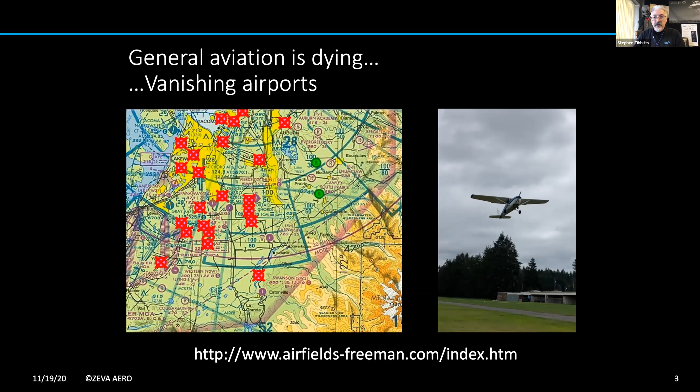There's over 500 small airports between Seattle and Portland that have gone away very quietly. They've become victims of developers and condos. So that was super discouraging. Back in 2003, I started thinking about this: wanting to take advantage of air travel for local flights and not having airports was a real problem. So I actually started thinking about it and looked at a number of different things.

But in 2005, I wrote a grant proposal to NASA entitled EVA, Tilt Rotor Electric Vehicle for 21st Century Atmospheric Flight. At that time, nobody was really looking at the space. I got 2 thumbs up on the grant and 1 thumb down, so I didn't get the grant—you had to have all 3. But I built a model and messed around with it a little bit, and then I didn't have money, so I put it on the shelf.

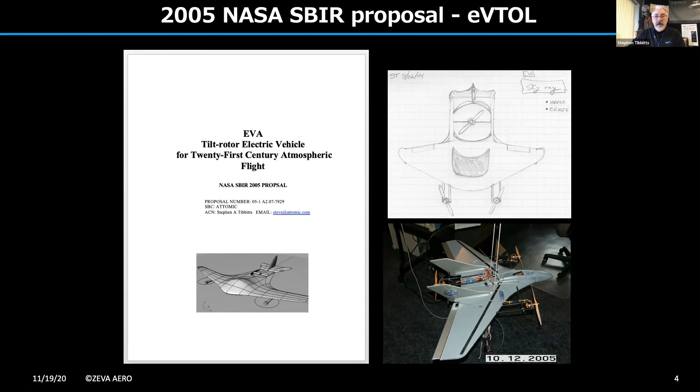In 2017, we learned about the Boeing-sponsored GoFly prize, which is a $1 million X Prize. So we put a team together to go after this. All of a sudden, the world had caught up to my idea, and everybody thinks it's a good idea to look at eVTOL. And just after that, in 2018, Uber Elevate 2 happened.

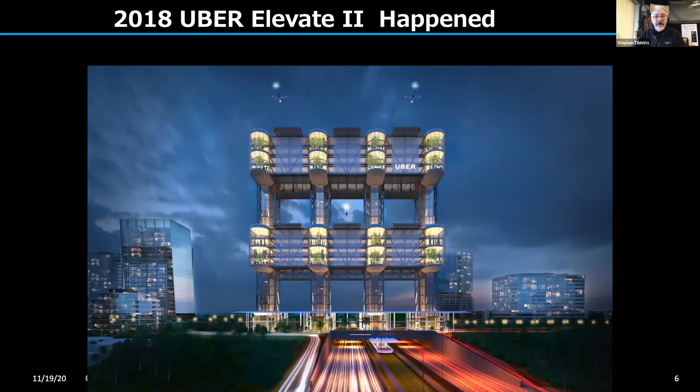So in 2020, here we are—there's over 120 vehicle companies. Some people say there's as many as 180 vehicle companies. The market continues to heat up, the analysts are getting involved, and big money's jumping in because they see trillions of dollars at stake. Uber, Toyota, Hyundai, Intel, Boeing—these guys are all making huge investments. The analysts are getting on board too, with Morgan Stanley saying $1.5 trillion globally by 2040.

So what we're involved with here is a paradigm shift. The shift, I believe, to eVTOL transportation represents the largest market opportunity of our lifetimes. In fact, just this week, a Frost & Sullivan report came out—they predict 430,000 urban air taxis by 2040, which is very much in line with where we're at.

This is ZEVA specific here, how we see the whole thing rolling out in time. 2020, eVTOL bursts onto the world stage. Through the GoFly competition and the work being done at Boeing, Airbus, and Joby, in 2025 we see air taxi service begin—though some companies say they can pull that into 2023, which I think remains to be seen. We see UAM being ubiquitous by 2030, and by 2035 there's room for personal eVTOL ownership. By 2040, we believe consumer-owned eVTOL will become the norm.

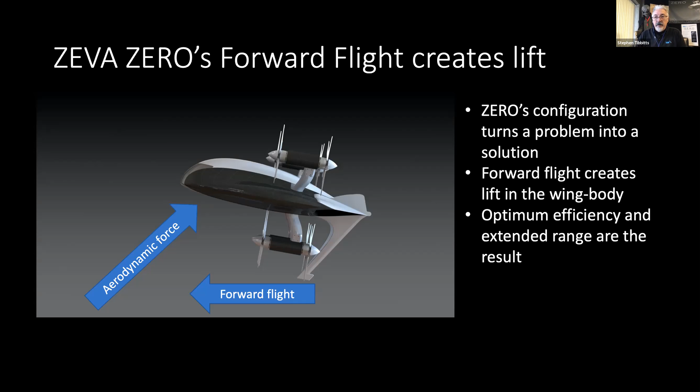The differentiation, or claim to fame, what makes us unique, is that we're using a blended wing body to create lift. As we travel through the air, once we're in transition, we get lift from the body, so we're able to use a lot less energy. Whereas other vehicles like EHang and many others are hanging on the propellers the whole time, they have to burn energy just to stay in the air. We can go faster and farther with about a 50-mile range. That's the big differentiation, and it's getting the attention of a lot of people interested in this kind of technology.

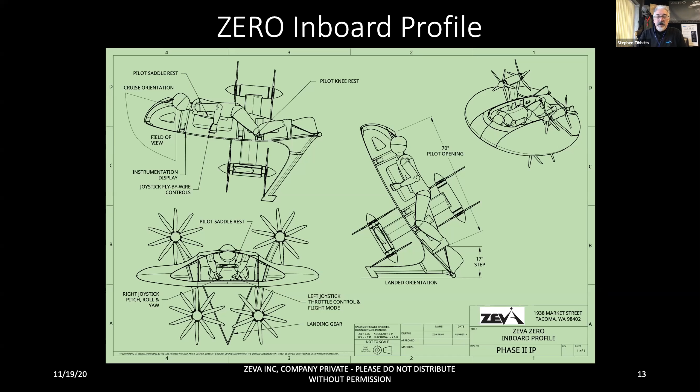You get into the machine standing up vertically, and then you're prone as you fly. We did this for a number of reasons, but the whole design of the Zero, our first machine, revolves around the specifications of the GoFly competition. Obviously, in the future, we'll look at different vehicle architectures for probably 2 to 5 passengers and different accoutrements inside the cockpit.

One of the things we recognize is that by 2025, our goal is to make the Zero a flying robot that happens to be skilled at moving people and things around. So we want to have full autonomy at that point. That requires, in our minds, a conversational AI in the cockpit, and full integration with regional air traffic management. I'm currently sitting on two NASA working groups to discuss how that all works in terms of air traffic management, how vehicles communicate, and what algorithms are used to figure out how to keep people from running into each other, which is very important.

We have a seasoned team, about 25 engineers and designers. We did attend the GoFly X Prize in February of this year, just as COVID was unreeling, but no teams qualified, including us. We were behind schedule and weren't able to fly at the competition, and basically none of the teams were able to fly due to various reasons. But the prize is still open. We are still involved, and the first team to run the course, so to speak, will get the prize.

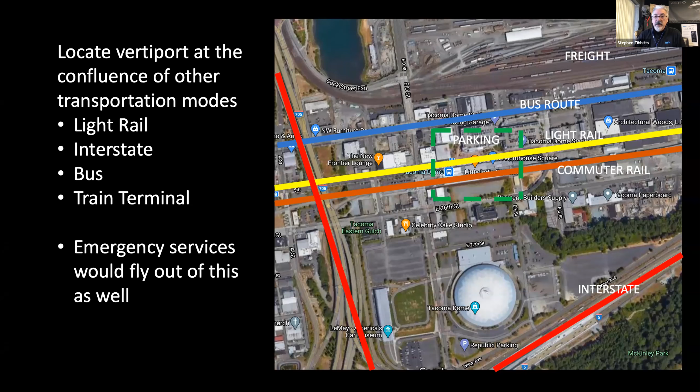We're in Tacoma, I'm most familiar with it, so it's easier for me to pick on Tacoma as an example. We really have a unique situation here where there's an excellent confluence of transportation modes right almost in the heart of the city. The idea is to be able to fly into an area like this and be able to use light rail, or jump on the bus, or an Uber or Lyft, or whatever your other mode of transportation is. If you can't walk, there are other modes of transportation within this area.

One of the things I noticed is that the Seattle-Tacoma area is not really even on the radar screen. If you look at people studying this, there's a lot of major cities jumping in and already have plans for and developing vertiports. So I want to make sure we're not asleep at the wheel here and that people recognize this is definitely happening and we need to stay on track. So that's all I have.

Outstanding, thank you so much, Stephen. Wild times on the aviation frontiers, eh?

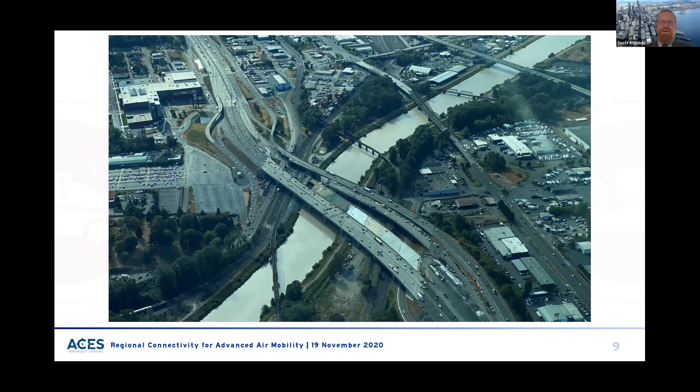But if you look out from this picture, you can see there's a lot of options in terms of placing urban air mobility centers. We have the Tacoma Dome, which is near a Sounder rail station. And that Sounder rail station, of course, serves Seattle to the north, but it also serves Lakewood to the south, and Amtrak serves Portland from there. So there's our connections that we could make that are intermodal connections, multimodal connections, in fact, that could provide some resiliency against structural failures and structural collapse.

Here we're looking at the Interbay area in Seattle. That's the Ballard Bridge, which I think a couple months ago decided that it was going to be stuck open. One of my friends posted on social media that only in 2020, when there's no traffic, could a bridge being stuck open cause you to sit for 3 hours. And so we have a maintenance problem with bridges.

And if you look at the Interbay area, what you see is that, of course, Magnolia is up on top of a hill. And again, Magnolia is served by 2 bridges. One of those bridges is in dire need of replacement, the Magnolia Bridge. But the Interbay area is not that far above sea level, in fact, it's very close to sea level. And during a subduction zone event, a tsunami could easily wipe out Interbay.

And of course, to the south of downtown Seattle, we're looking at another place that's just sitting a few feet above sea level. That is our beloved Boeing Field, King County International Airport, where the airport elevation, as you can see from this IFR plate, is only 22 feet. The touchdown zone elevation, the TDZE, is 18 feet. What happens when Boeing Field is underwater for a few minutes, a few hours, maybe a few days?

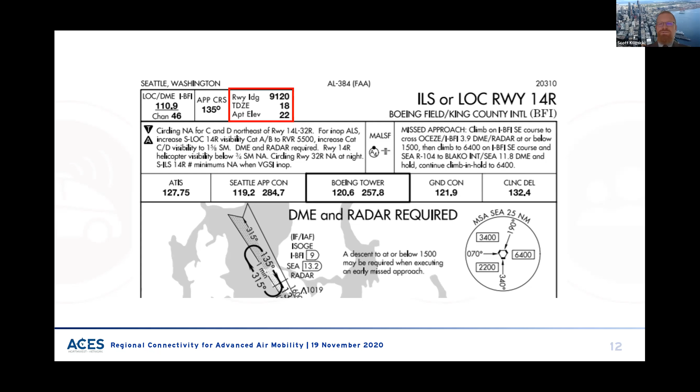Cleanup efforts take a long time. Will we be able to access the aircraft located at Boeing Field? The experts are saying, probably not. Be prepared for that. Maybe it's better to have some aircraft at Renton Airport, where the effects of a tsunami would be greatly mitigated by Lake Washington.

So what we're looking for is redundant links. That's what I've kind of been discussing here so far this morning. And these can happen not just, again, because of the likelihood of a subduction zone event, but from utility failures, from slope failures, from bridge collapses. Those could be caused by any number of factors.

But the real thing that we need to understand is that our region will be imperiled if we don't have these links, okay? And this is a critical issue for us, is what do we do in this region where we're surrounded by water? It's absolutely beautiful. I think we all value and treasure the natural environment here, but it presents incredible challenges in terms of transportation, even when everything is working well.

So let's talk about disaster recovery for a little bit. I happen to be the squadron commander of the Renton Composite Squadron of the Civil Air Patrol, which is the United States Air Force Auxiliary. We are called upon by the Air Force to provide search and rescue and disaster recovery services in all 50 states and in US territories.

Some of my colleagues in CAP recently flew disaster recovery missions in Puerto Rico using unmanned UAS, unmanned aerial systems. And they did that in order to collect aerial photography and other information that was then used by FEMA and other agencies to understand the breadth of the destruction in Puerto Rico from the hurricane.

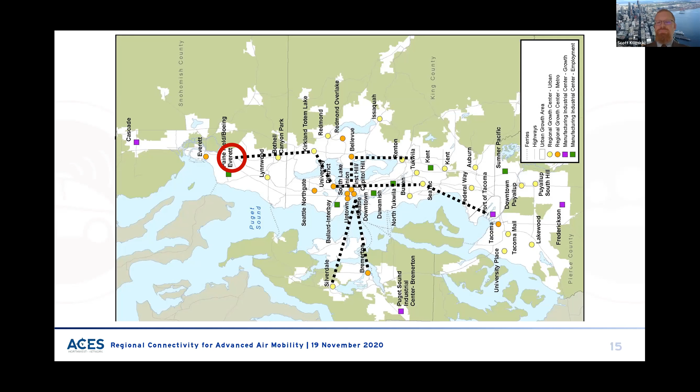The area that I've circled in red is the South Everett Park and Ride, which last year at this time was over capacity. More people were trying to park and use the South Everett Park and Ride to access public transit and also form carpools than they had a number of parking spaces.

So about 3 years ago, I was looking at park and rides throughout the region, and I was asking myself, why don't we do what they do in the Middle East and Southeast Asia and Europe and make money off these things? Right now, this is a parking lot.

It's a nice parking lot. It has trees. We have a bus pickup area with some shelters, but there's no vertical development here.

And if we have this demand to commute into downtown Seattle, and maybe we don't have that demand anymore, but we have demand to commute all over the region for meetings, events. As we recover, we're going to have a much more mobile society that's going to take advantage of digital infrastructure and be perhaps constantly on the go.

And we've seen that already looking at Interstate 405. There is more congestion now in the middle of the day than there was a year ago in October of 2019. And that's pretty stunning to think about. And what that means is that people's travel patterns have changed dramatically.

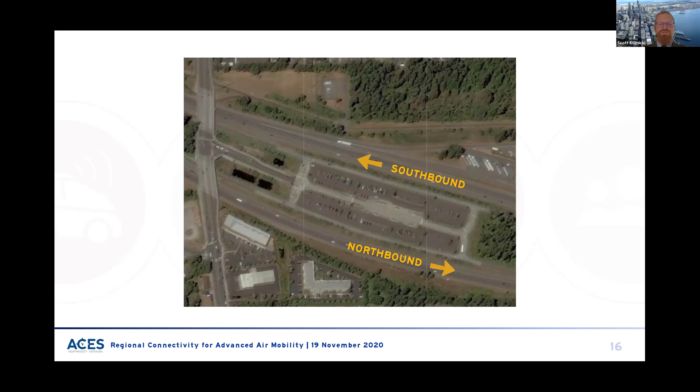What if we could do something totally different with this surface park and ride? Or any conventional park and ride. Here's a conventional park and ride.

It's filled with cars, people lined up waiting for buses, people getting off buses. Not a lot of activity other than this kind of one single use that's been accommodated by a conventional park and ride.

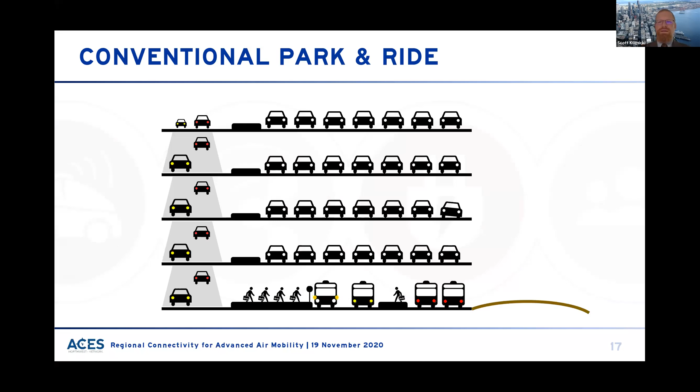And I'm suggesting that perhaps we need to add some value and leverage the significant amount of private equity investment capital that's available even today to change these park and rides and turn them into service centers for mobility. And then let's go further and create revenue generating marketplaces here.

And we can accommodate all these uses. We can give people what they need while they're commuting, while they're going about their day, while they're connecting to other mobility services. They can charge the vehicles, they can purchase some food, they can obtain some medical care, they can buy some groceries, they might even be able to get a haircut.

These are all things that are possible in a marketplace like this. And all of these small businesses and franchises support the ongoing costs of servicing the debt that is used to build these structures and the cost of maintaining and operating these facilities.

But we're not just talking about cars. We're talking about the future of mobility, and that's why we're here today. And the future of mobility is awesome.

What you see here is a mobility marketplace in 20 years with highly efficient solar generation facilities on the roof, racks of batteries that store that energy so that it can be used on the cloudiest days and overnight, electric vehicle charging stations throughout.

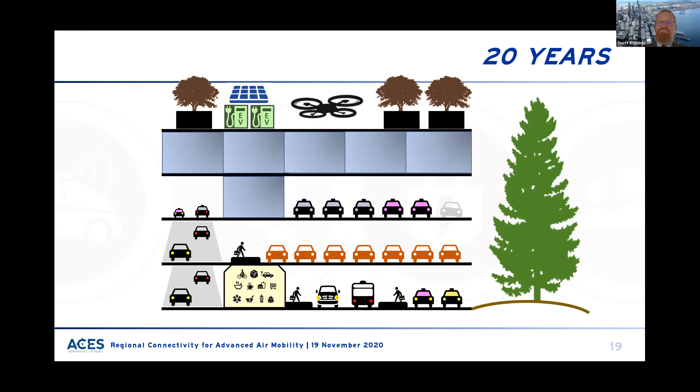And as we've learned today, the likelihood that that will be advanced air mobility is extremely high. I would say it's inevitable. And advanced air mobility plays a critical role in connecting these regionally distributed mobility marketplaces. Let's call them park and rides that finally grew up.

So we certainly want to concentrate the services that commuters and the traveling public want. We want to create a flexible design. As you saw there, we're talking about single flat level parking decks that could be completely reconfigured in the future. I talked about amortizing the capital costs, but the important part is that it isn't just all about an old fixed route, fixed schedule model that's no longer working for people in this new normal. And that's why we want diversity and innovation.

And when the pandemic is over, who doesn't want to be in a private cabin in a shared ride vehicle where they can conduct a private conversation on the phone? I think that that's the future that we see. And so that diversity and that innovation is these individualized services that replace these outdated models. And most importantly, it's a transformation that will be sustainable hubs for EV charging. And that EV charging, interestingly enough, includes battery swaps for EVTOL vehicles. And perhaps we'll have a chance to talk about that during the Q&A.